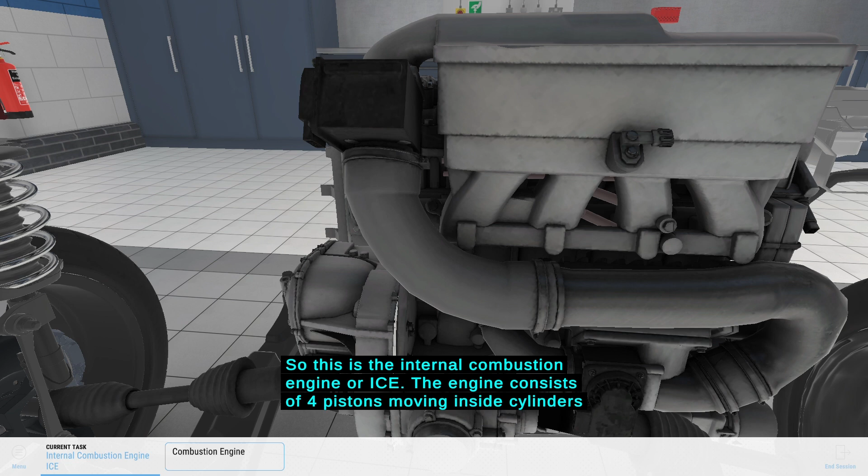Okay, let's go through the different engine types that we'll be looking at. So this is the internal combustion engine, or ICE. The engine consists of 4 pistons moving inside cylinders, all connected to a rotating crankshaft. The engine uses a conventional style transmission system to connect to the road wheels. In an ICE, the ignition and combustion of fuel occurs within the engine itself.

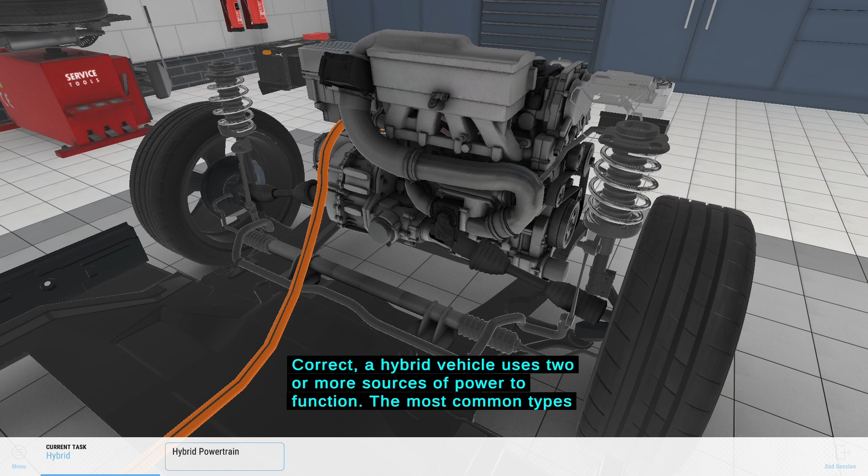Here we have a hybrid powertrain. Do you know anything about these? I think these ones use more than one power source. Is that right? Correct. A hybrid vehicle uses 2 or more sources of power to function. The most common types of power source are gasoline and electricity. Vehicles that use electricity for one of the power sources are known as hybrid electric vehicles, HEVs. The first modern HEV was the Prius, produced in 1997 by Toyota. So the Prius was the first modern HEV.

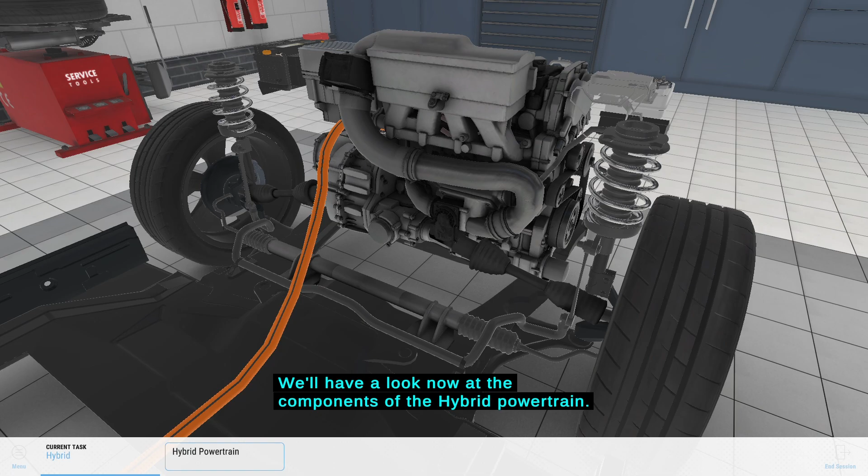We'll have a look now at the components of the hybrid powertrain. An electric traction motor drives the wheels and/or charges the battery pack. So the electric traction motor drives the wheels as well as the combustion engine. Good question. Hybrids connect the combustion engine and the electric motor to the wheels using something called mechanical coupling. This means that both the electric motor and the internal combustion engine drive the wheels directly.

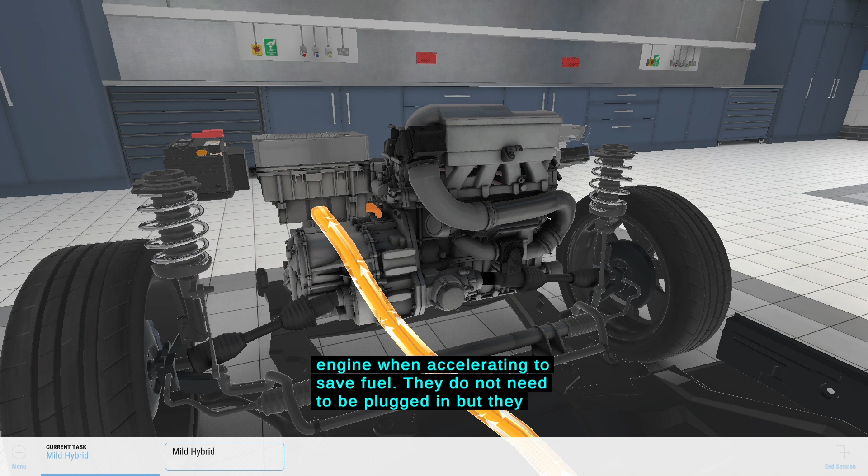Here we have a mild hybrid engine. Do you know anything about these? Not sure about these. Mild hybrid cars use an electric motor to assist the petrol or diesel combustion engine when accelerating, to save fuel. They do not need to be plugged in, but they cannot travel on electric power only. So they use fuel as well as electric. That's right, they will use at least some fuel for all journeys.

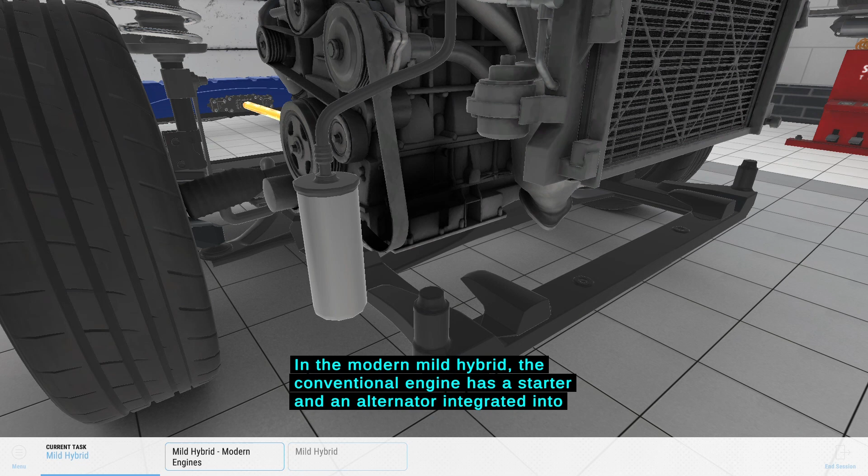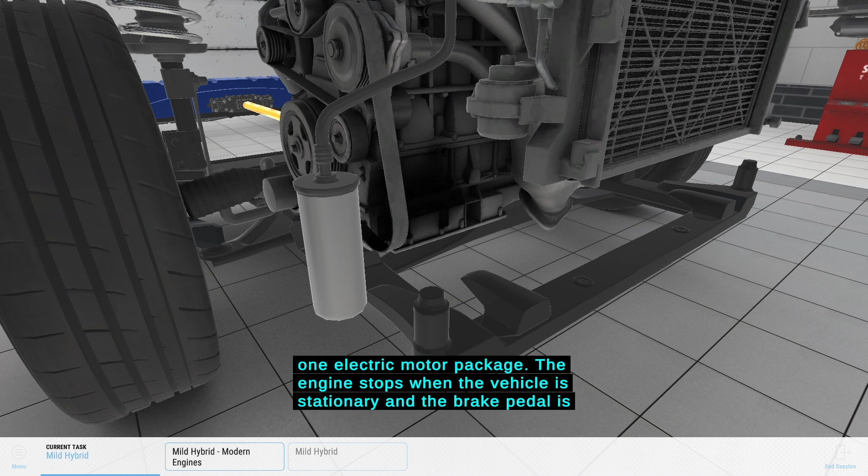We'll have a look now at the components of the mild hybrid engine. In the modern mild hybrid, the conventional engine has a starter and an alternator integrated into one electric motor package. The engine stops when the vehicle is stationary and the brake pedal is pressed, with automatic transmission, which is known as stop-start or micro-hybrid. Charging only takes place during deceleration or braking.

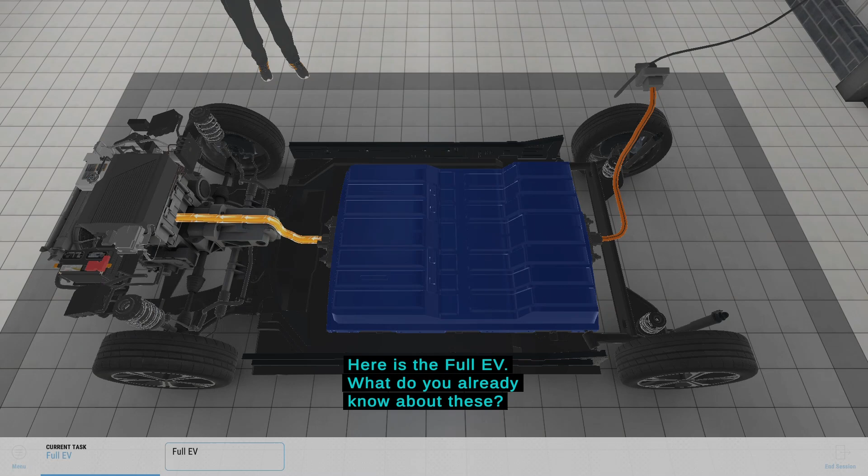Here is the full EV. What do you already know about these? It's powered by a battery. Yep, the electric motor is powered by the battery pack. Anything else? It doesn't have an engine. Correct, a pure EV doesn't have an engine. Also, the battery pack is recharged from the domestic electricity supply or during regenerative braking.

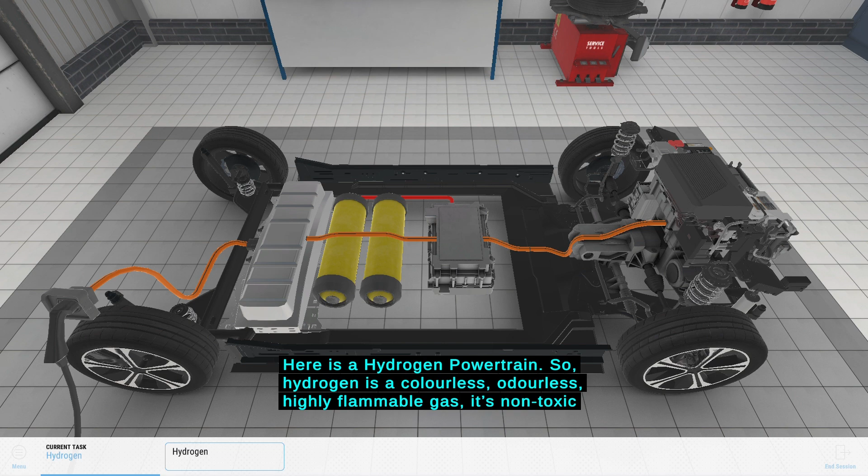Here is a hydrogen powertrain. So, hydrogen is a colourless, odourless, highly flammable gas. It's non-toxic and non-poisonous. It is the simplest, lightest element, lighter than air, and is the most abundant chemical substance in the entire universe.